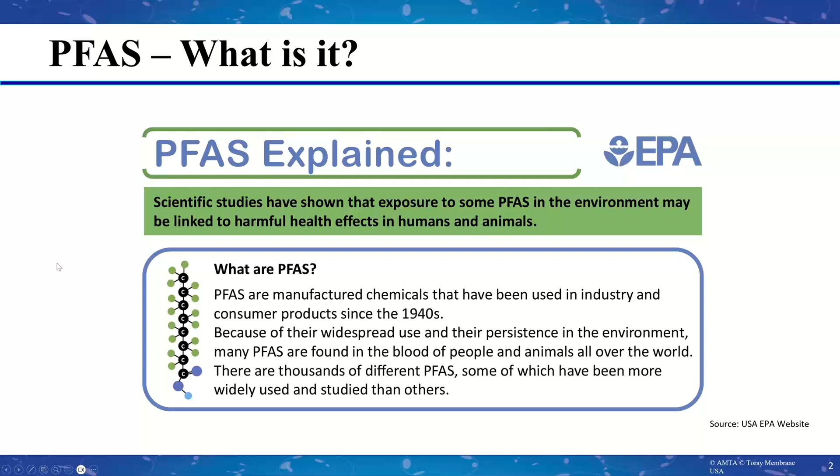Okay, so let's talk a little bit about what are PFAS, right? So PFAS are these manufactured chemicals that have been used in industry since the 1940s. So very, very common. We've all been exposed to them. There's widespread exposure amongst our population and amongst our waters. And you can find PFAS in the blood of people and animals all over the world at this point. So there's essentially full spread of these compounds amongst our society.

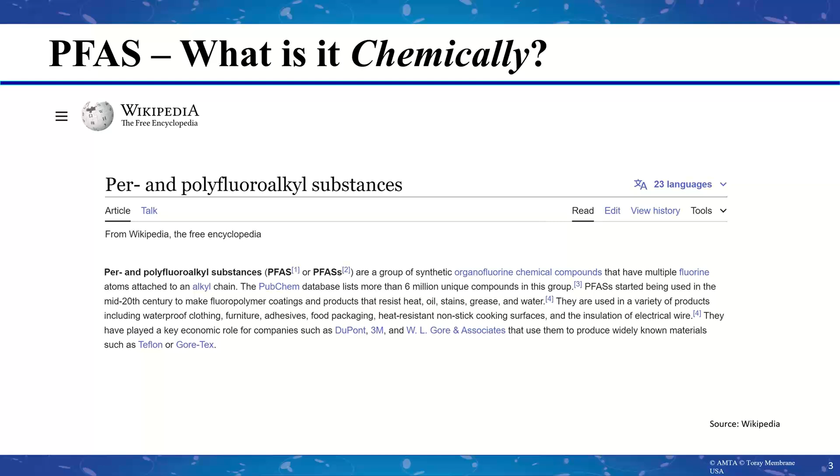And when we first started talking about these five years ago, we wanted to understand what is it that we're talking about. So what we're talking about is per and polyfluoroalkyl substances, right? So this is a family of chemicals, and it's a fairly broad family of chemicals. And they're all synthetic organofluorine chemicals. So if we're going to try and define that, if we're talking about organofluorine, what are we talking about? That means it must have multiple fluorine atoms and that they are attached to an alkyl chain, right? So that means you've got a carbon chain, and you've got fluorines directly bonded to the carbons on that chain.

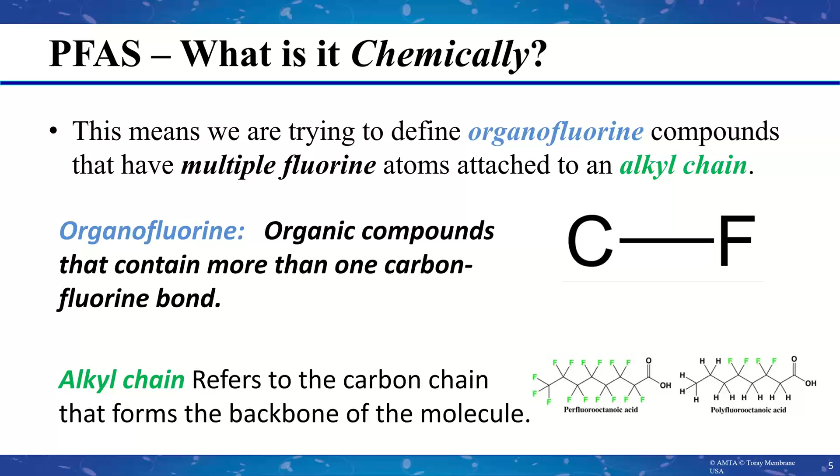So you put these two things together, and we have all sorts of examples of carbon fluorine chains that can take all sorts of forms. This particular example here is a PFOS, which is a fluorosurfactant.

I remember as a kid growing up and going skiing and spraying my clothes with Scotchgard to make them waterproof. That seemed great at the time, and knowing what I know now, maybe not so awesome that we were spraying our clothes with a carcinogen, right? Scotchgard itself, this particular chemical, is currently illegal in California and Maine, and obviously we're seeing more and more legislation that will limit and or prohibit the use of this type of chemical going forward.

Another example, which there are documentaries out there on, is PFOA, also known as C8, known for its 8 carbon chain structure. It's a carboxylic acid, used as an industrial surfactant, primarily to make Teflon, which as we know is very, very widely used.

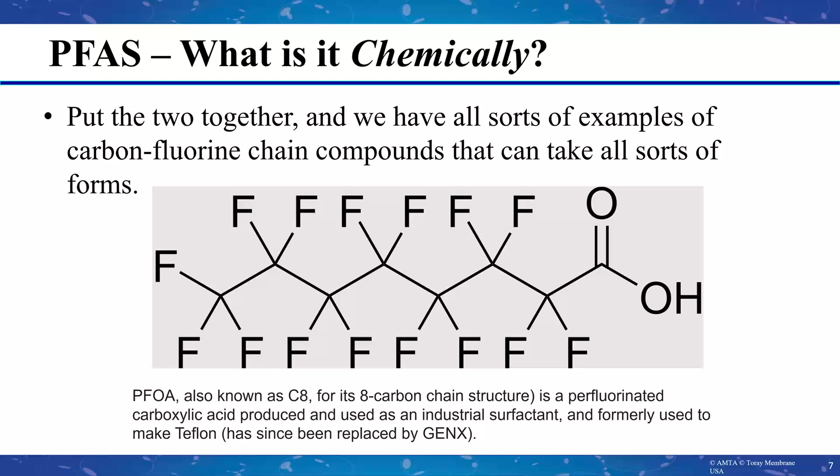So why were these chemicals used in the first place, right? The carbon fluorine bonds are one of the strongest single bonds in organic chemistry. What that means is these chemicals are very, very stable, which if you're making chemicals is usually useful in industry. It means they're less susceptible to breaking under exposure to other chemicals.

If any of you have ever worked with some of these in the past, that's why they work - they do not break down under the presence of other chemicals or oxidants, that sort of thing. They typically do not break down under heat exposure, and I'm talking about moderate heat exposure. Under extreme heat exposure, incineration type temperatures, you can break these carbon fluorine chains, but heat is not an especially effective way of breaking these chemicals down.

As surfactants, they could resist water quite well, right? Thus the Scotchgard use. And they could prevent bonding of food with pans. They could also prevent bonding of food with wrappers. So we've seen a lot of PFAS be used in food containers over the years as well.

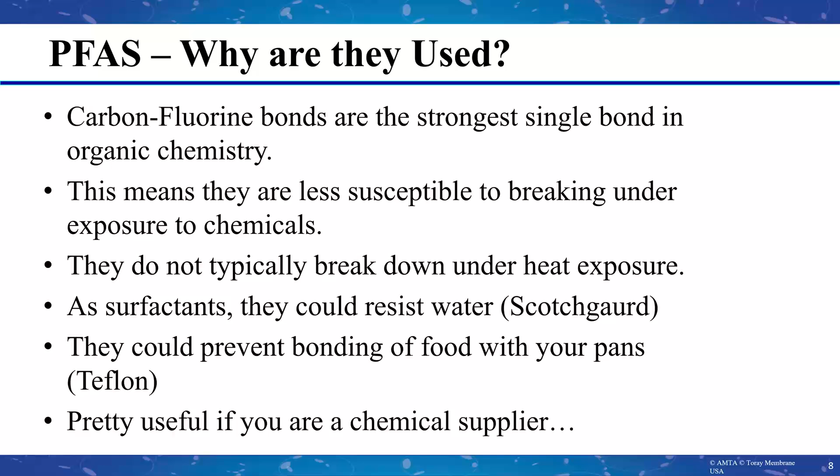So I bring all this up because all of these things are quite useful if you're a chemical supplier. But there's some downsides here that we've learned over the years, and because of this, that's the main reason why Teflon was used in non-stick pans. They used this example, the happy pan - I mean, I guess not so happy if you have cancer later from it - but as fun as that sounds, this is why things are moving away from this direction.

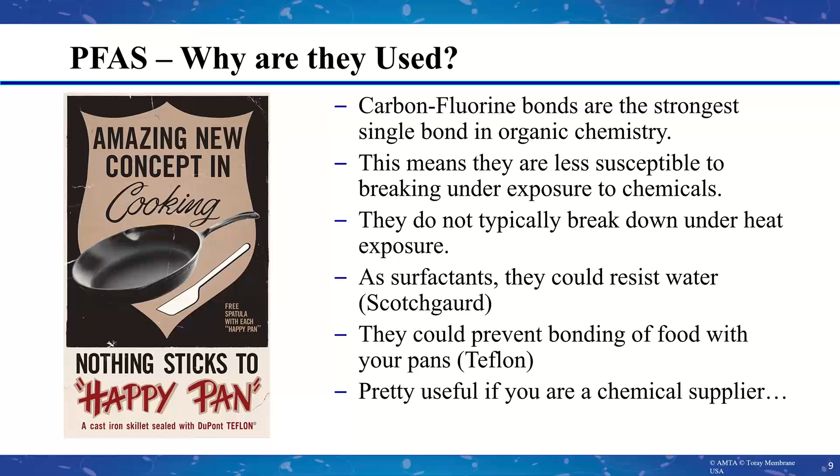So that brings us to, okay, we've identified these chemicals. We understand they're prolific in our environment, in our bodies even. And what is the North American situation? In the U.S. it is quite widespread, partially because DuPont and 3M were companies manufacturing this on a large scale in the U.S.

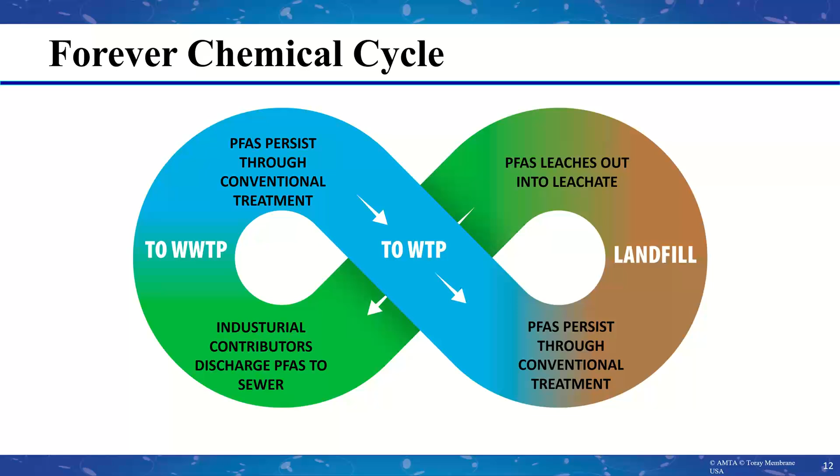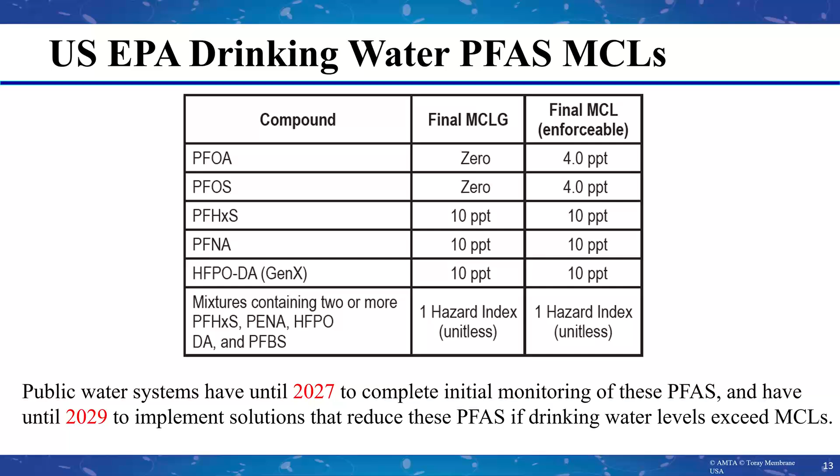And when we're talking about these PFAS removal technologies, there's multiple different ways of performing this. But when we're talking about reverse osmosis or nanofiltration, we're talking about liquid to liquid separation, right? And compare that, I'm trying to make that distinction between that and a solid to liquid separation, which would be the case in terms of carbon or resin style of separation.

So if we're going to talk about carbon just real briefly, right? Carbon is an absorption technology. It is the cheapest initial cost. That's nice. But what are the downsides? There are enormous disposal concerns, right? And the historical problem with carbon is, yes, it captures some of these PFASs, but it doesn't catch all of them. And then even in the ones that it does, now you have a disposal problem with carbon. You've got a contaminated media that you have to get rid of.

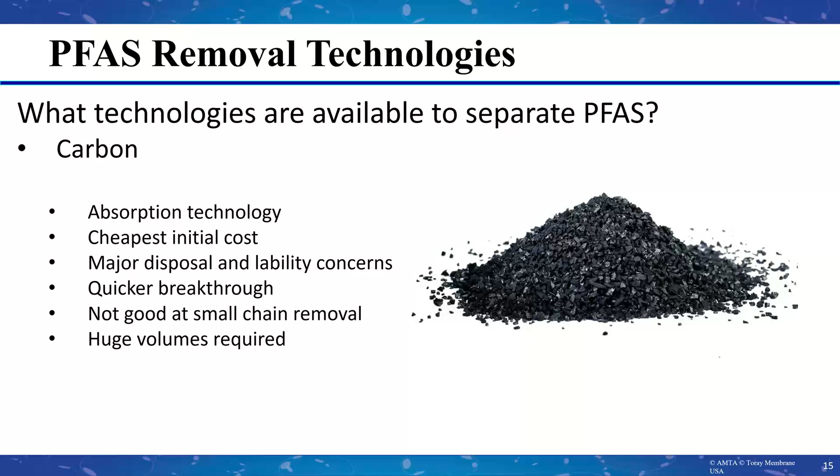They do have quicker breakthrough with carbon compared to the other technologies. And it's effectively not very good at small chain removal, right? The longer the chain, the more clumsy that molecule, and the easier it is for it to get caught in essentially the holes of the carbon. So small chain removal is quite ineffective, and huge volumes required, right? Huge volumes of carbon, and that can mean real estate on the water treatment plant site, which maybe they don't have. But again, that huge volume also goes back into the disposal issue.

And we've seen resin come into this space as well, and resin's made quite some good progress. It does have higher removal capacity than carbon. It's sometimes absorption only. So a lot of the original resins for PFAS were absorption only, but that means replacement is still required. It is higher cost than carbon, but typically lasts longer. Some are regenerable, but the regeneration can be quite expensive. And there's varying contact times, et cetera. So, we see resin playing a piece of the role in this PFAS separation scheme.

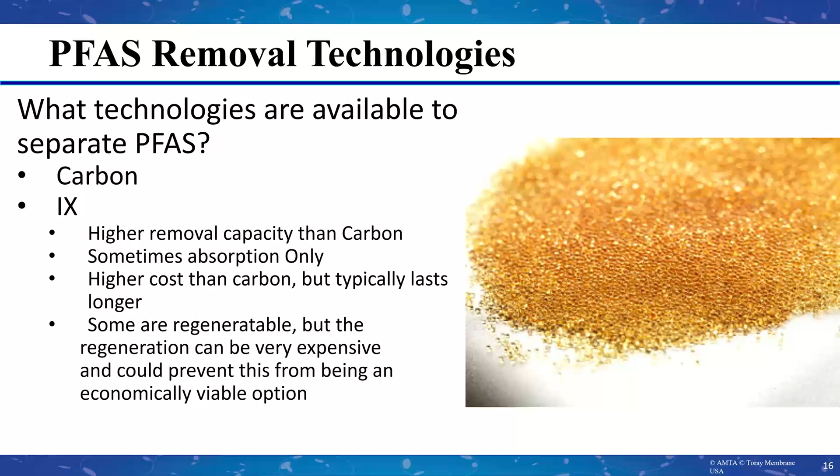But from what we're seeing, I think RO is going to play a very big role as well. And what about RO, right? So, in terms of separation, it has the best separation for all chain lengths. And this is a big area of R&D for Toray.

Compact footprint, that's nice, right? We all know how big an RO system is and how much water you can get out of a given space, and it is quite efficient in that regard.

We're getting better at it, right? If you had asked us 3 years ago what our rejection rates were of different PFAS molecules, we'd kind of look at you and say, I don't know, give it a try. We can make a guess based on its molecular weight, or whether they don't have much surface charge, which is the primary method of rejection for RO. But we could make some educated guesses, we didn't have a lot of data.

But we have been gathering data in recent years. And keeping it in the aqueous form, liquid to liquid concentration, does manage your liability, right? You don't have this disposal issue that you have potentially with some of the other products that are out there designed to help with this issue.

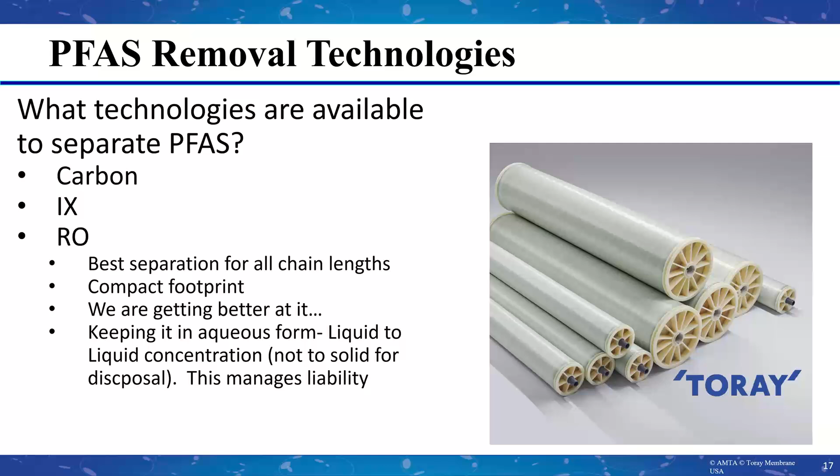Now that doesn't mean you're done with RO, but this might be one of the key steps in getting us where we want to be in our treatment scheme. And since I am from Toray and we focus on membranes, I would like to talk about membrane separation, specifically with PFAS and other low molecular weight, low surface charge constituents, and talk about what we're doing to figure out how to better reject PFAS with our membranes.

With any membrane, you're trying to get to this optimum goal where you're trying to pass as much water as possible and prohibit as much dissolved constituents as possible. And the best way to do that is to make your polymer chains as consistent as possible, right? We call it polymer chain cross-linking.

So this is when you make an RO membrane, you're effectively making a polyamide. A polyamide is a cross-linked polymer chain. And what you're trying to accomplish is to make these chains very consistent. The more uniform that you make it, the better results you will ultimately get with your combined water quality and energy savings simultaneously.

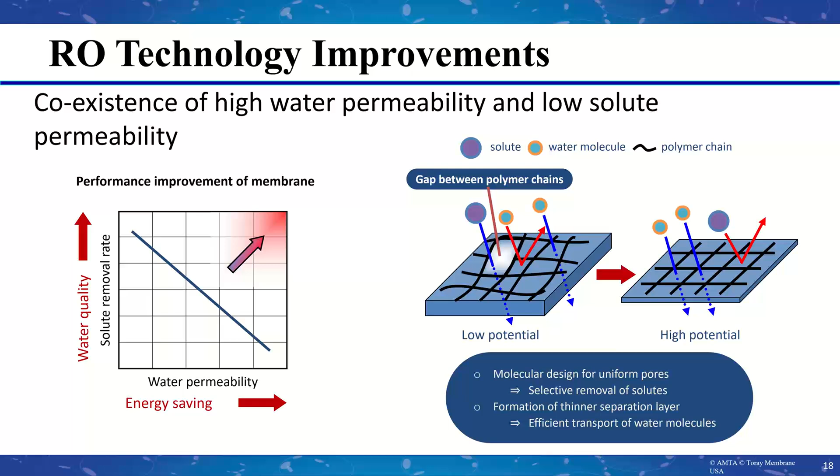And if we look a little bit closer at these membranes with some of our equipment here, our scanning electron microscopes, you can see what that membrane surface actually looks like. Now the membrane thickness is super thin, right? I want to say it's around the 20 nanometer thick range for the actual thickness of the polyamide.

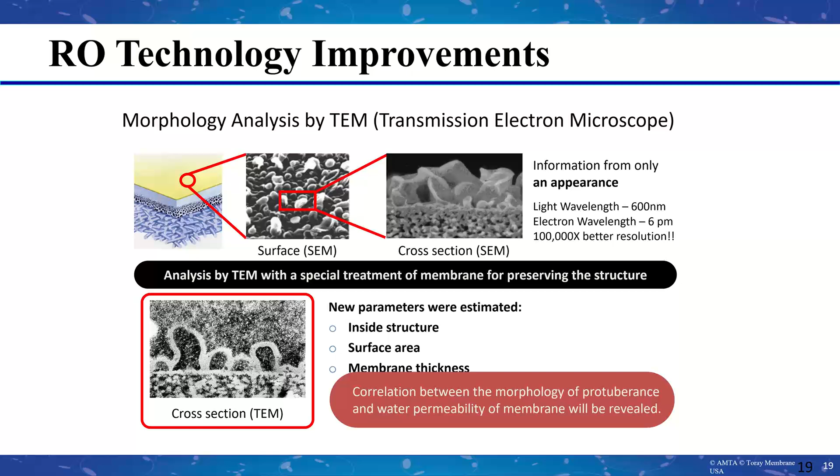So super thin. And you can see that cast on top of the polysulfone layer below, it actually isn't as smooth as you might imagine, right? It has what we call these protuberances and interstices, which are these peaks and valleys that we see in that polyamide. And breaking that down further, right.

It is very important to have a more consistent distribution of thickness, right? Because if you have thin areas, that is where most of your salt passage will occur. And if you have areas that are too thick, then you will not get sufficient water flow through those regions. So the goal is to make a very consistent but also very thin polyamide layer, and that's going to give you the best performing membrane that you can make.

So Toray spent a lot of time and effort in understanding these protuberances, how they form, how to control them, how to make them as consistent as possible. And this is really neat. These are some images that we've only made public in the last couple of years, but they're quite extraordinary. I've actually been to the R&D plant in Shiga, Japan, where we have the microscope that took these pictures.

But this is the cross section of the protuberance. As you can see, we're already at 20 nanometer scale, which is extremely high resolution. But this microscope can go all the way down to 2 nanometer scale, which is nuts. Because what you're looking at in the image on the right are the actual polymer chains of the membrane. So you're seeing atoms there, right? Which is really extraordinary that we can see this.

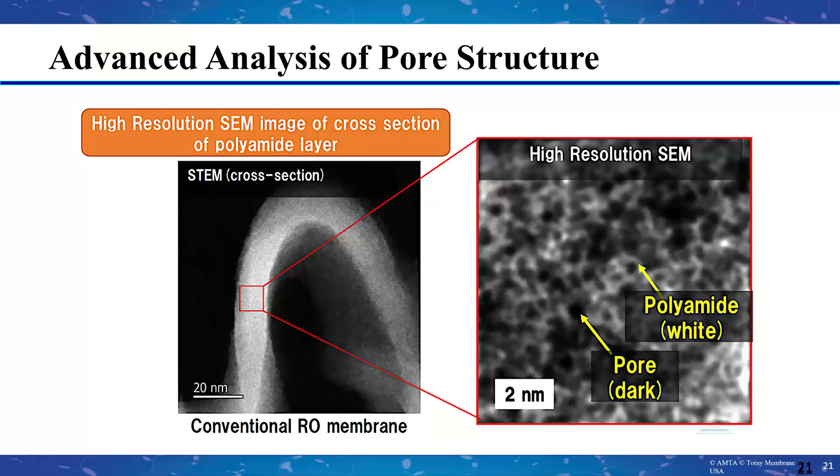And there's been some debate in the past about whether or not a membrane is a solution diffusion model, or if it should be a pore model. And we're quite confident it should be a pore model, because we can see the pores.

What does this lead us to? Why are we taking these pictures? Why are we spending this money to do this? Well, it's important for us to understand cross-linking on a very intimate level, and understand what changes we can make to increase the cross-linking and make that better.

And by closing those up, it doesn't significantly change your sodium chloride rejection, because that rejection is primarily held off from the surface charge of the membrane. But what it does change is the low molecular weight and/or low surface charge compounds.

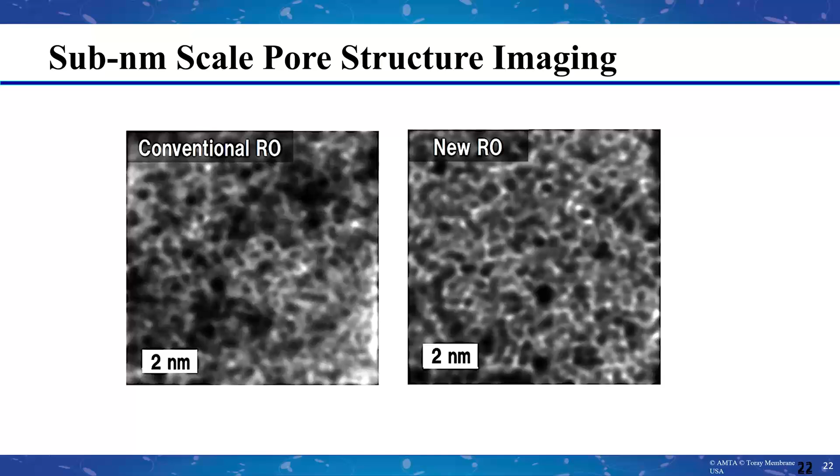And the reason that's important to us with this conversation is short chain PFAS, that's what we're talking about. You're talking about compounds that have very little or no surface charge and have very, very low molecular weight. It can be very difficult to reject.

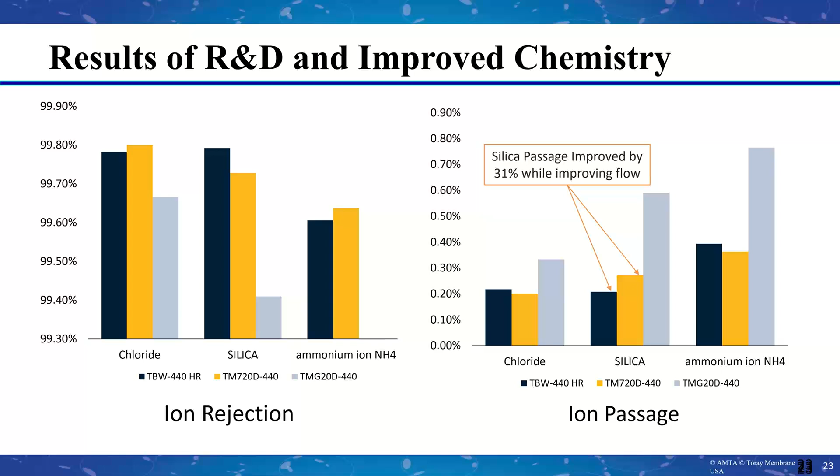The purpose of this webinar wasn't just to talk about RO and how RO can reject PFAS, because that's great, we've done this, we've separated these PFAS molecules out. But what on earth are we going to do with the brine? Because we've just moved the problem somewhere else, which is good in terms of handling high volumes of water, that's something RO can do, and we've moved it to a much smaller volume of water. But I don't think that means we're done.

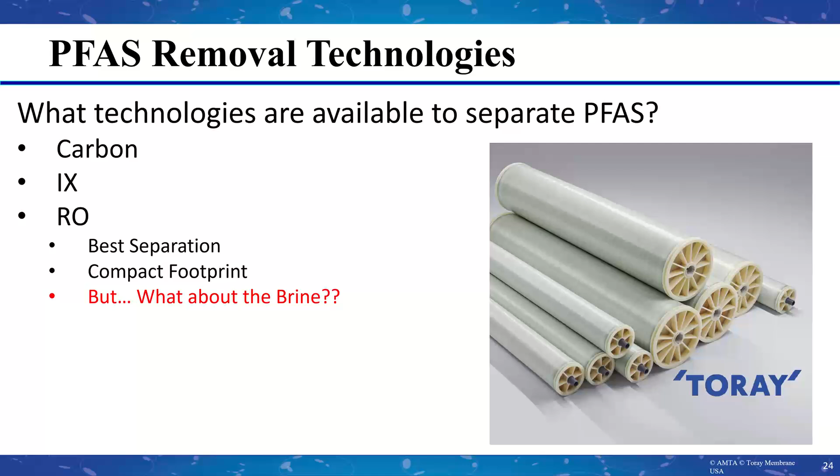And that's a big thing that Zia is here to talk about, because from here we need partnering technologies so that we're not just moving the problem downstream. We want to use RO to concentrate these PFAS, then use another technology to further concentrate, and then ultimately we want to get to full destruction. But you can't just use a destruction technology on the entire mass because of energy use considerations, et cetera. So with that, I'm going to pass it over to Zia, and she's going to explain more what solutions we might have with the brine.

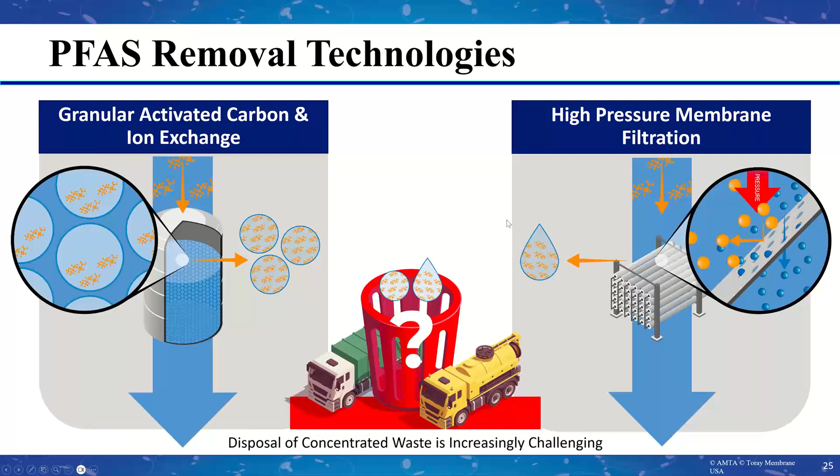So hopefully I can get the slide to go. There we go. Our focus today is going to be looking at the water treatment side, the drinking water plant side, really working to remove it from the drinking water, put it into a concentrated solution that we can then handle and protect public health, so we can protect our drinking water for all of us to continue drinking our tap without concerns.

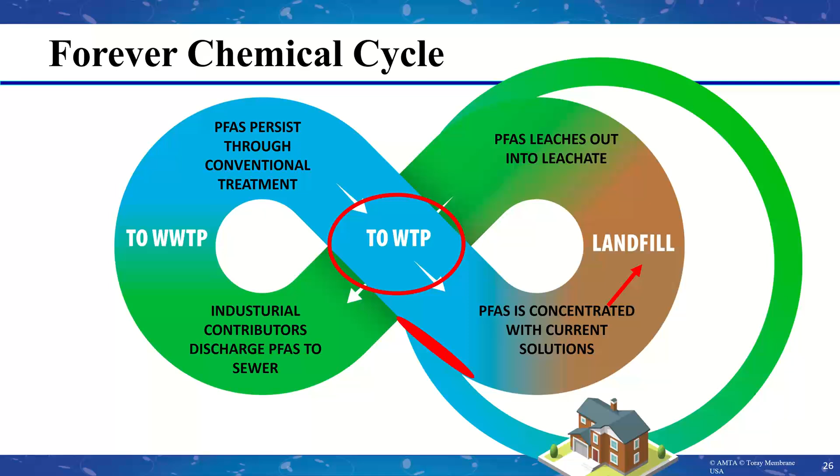We also see that PFAS is persistent, it's ubiquitous. There are studies showing it on Mount Everest from the ski wax and all the protective clothing you have to wear out there, all the way down into the Marianas Trench in crustaceans. So it is everywhere, and we see it throughout the entire water cycle. We see it in stormwater, drinking water, landfill leachate, whether that's from contributors or just stormwater falling on that landfill. So we really need to focus on a holistic solution that deals with PFAS once and for all.

See if this will go. There we go. So with the recent regulations in 2024, EPA came out with interim guidance. Obviously we also got the BOGO, buy one get one deal, of getting PFAS MCLs for drinking water, as well as the hazardous designation under CERCLA.

So with that, everyone's kind of figuring out where do we put these concentrated streams, and what do we do with those? The guidance currently, from the interim guidance from the EPA, is to use a hazardous waste landfill for concentrated streams, class 1 for non-hazardous. And I think we're all seeing that it's going to be an issue that persists.

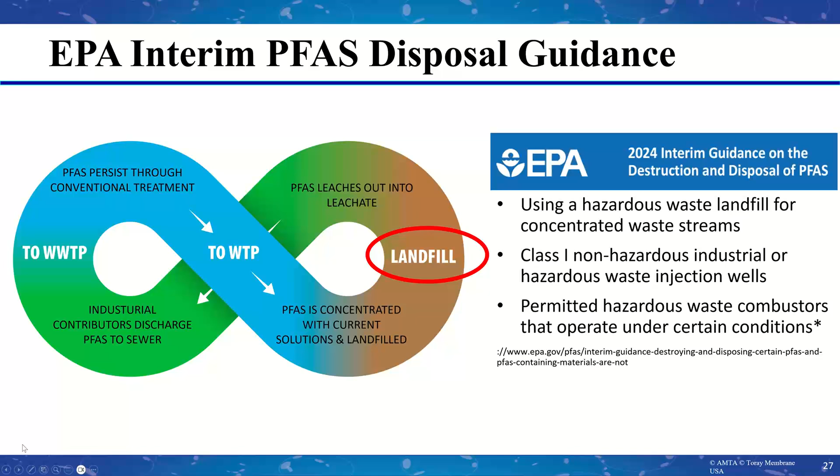If we're looking at PFAS destruction solutions, in the last 10 years people have been working on new PFAS destruction solutions. It's really accelerated in the last 5 years. This is a study and maturity scale that GWI, Global Water Intelligence, came out with in 2022. Obviously the market has changed, but from this 2022 maturity scale for technologies, the most mature that they rated was electrooxidation.

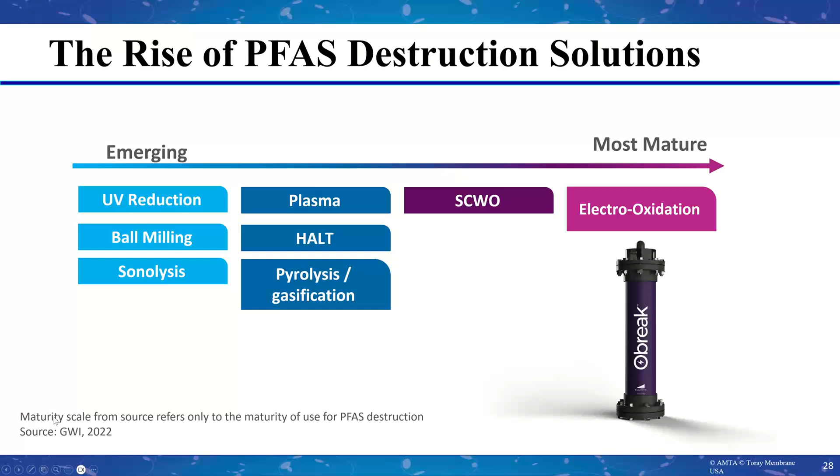So for our intents and purposes with electrooxidation, we're looking at high salinity waters.

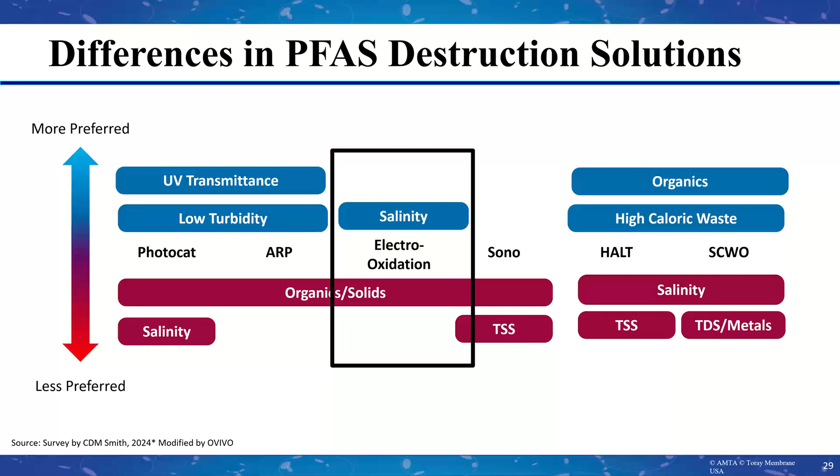Waters with higher salinity do quite well with electrooxidation, as it is a current-based technology, so the higher the salinity, the better conductivity you get, and so you have more efficient treatment. However, it doesn't handle organics or solids as well, and it really depends on the water treatment. So when we're talking about RO brine, electrooxidation appears to be a really good fit within that process flow diagram.

So electrooxidation. Obreak is our electrooxidation technology. It's electrochemical oxidation, or we just say electrooxidation. You pass a current through electrodes submerged in water. You have an anode and a cathode.

Unlike electrocoagulation, where you have a sacrificial anode that dissolves into the solution and creates a floc and sludge, this is a non-sacrificial electrode. So your anode does not dissolve into solution, and it remains with your reactor for the lifetime of that electrode.

It's a direct oxidation that is the main mechanism of PFAS destruction. It's directly happening at the surface of the anode. Electrical currents and oxidants come off of that anode, it interacts with PFAS, and we have a cleaving of the carbon-fluorine bond.

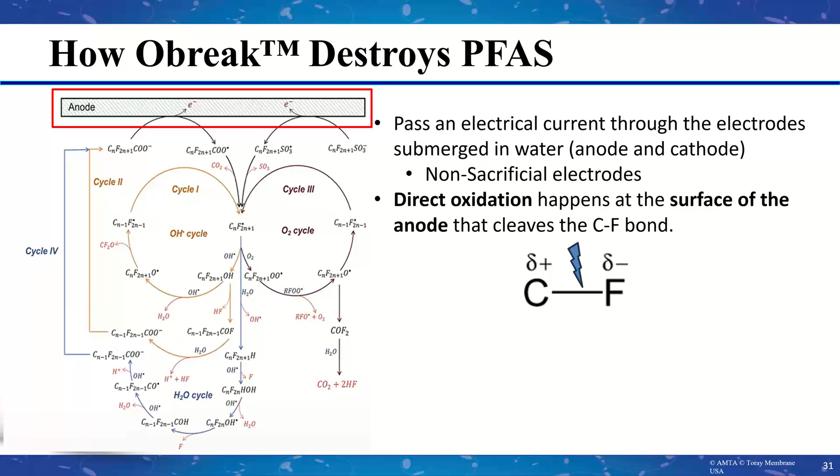So the higher concentration you have, the better contact with that anode you're going to get, and you get better efficiency for destruction. Indirect oxidation also happens within the solution, where radicals and oxidants are created with that electron transfer into the solution, and those oxidants then break down PFAS in the bulk liquid. It's not the main mechanism of destruction, but it is another reaction that does happen within the reactor.

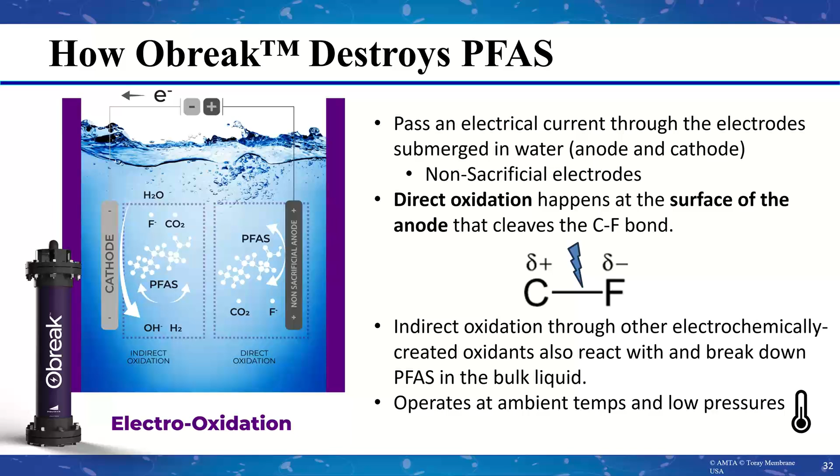One of the biggest positives for electrooxidation is that it operates at ambient temperatures and low pressures. Some of the other technologies out there operate at quite high temperatures and pressures to break down that C-F bond quickly. It's a little bit slower with electrooxidation, but it operates at ambient temperature and pressure.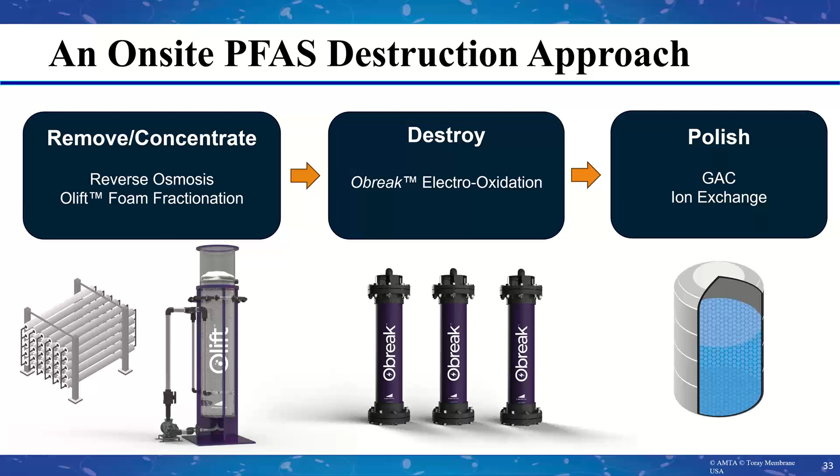So if we're looking at an on-site PFAS destruction approach, a holistic approach, we can concentrate it with reverse osmosis or Olift, which is our foam fractionation technology. We can destroy it with electrooxidation, and we can polish it with ion exchange and GAC. By including this concentration and destruction technology in your process flow diagram, you end up extending the lifetime of your polishing step and therefore really minimizing your disposal costs and volumes sent to the landfill or for regeneration.

So our case study that we've been working on for some years now has been done at a drinking water plant. This is a 10 MGD surface water plant. They have MF and RO, which was installed in 2020, and we've been working on the concentrate line - looking at how do we pair technologies on the brine to extend the life of their GAC prior to discharge back into their local river.

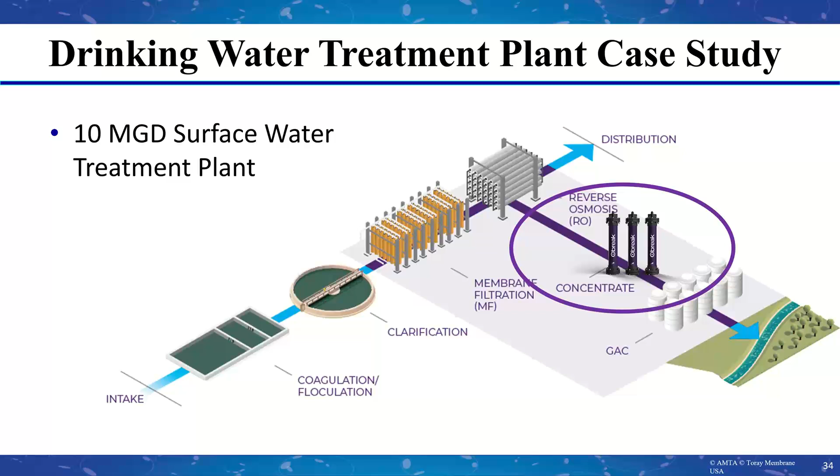And with that, I'm going to move on to some data here shortly. Hopefully I don't bore anyone with data, but too bad, it's the slides that we picked out.

So with reverse osmosis only for concentration, if you're taking a treatment train approach, it's going to look like sending 10 MGD to your RO at 90% recovery. So 1 MGD going to your electrooxidation, and then you would have your polishing step prior to discharge to the river, with 9 MGD going PFAS-free out to distribution to your customers.

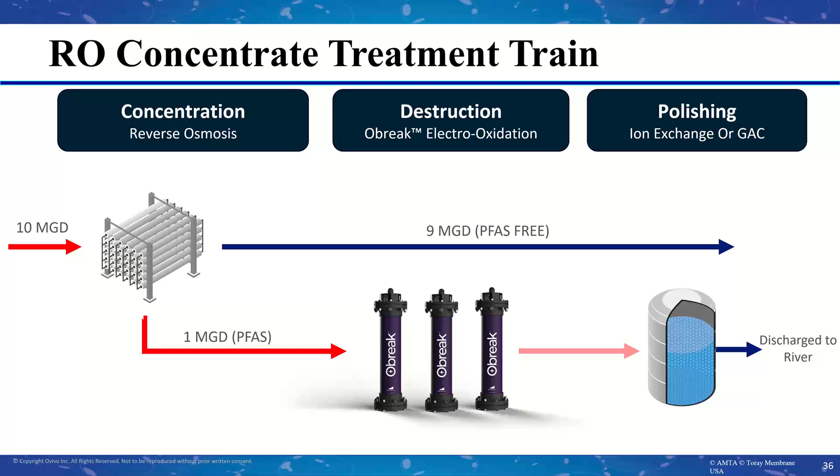So when we look at Obreak with RO concentrate only, so there's no further concentration upstream, we have 2 electrodes that we look at that we have available with Ovivo: our MMO electrode and our BDD electrode. And on the left, we have MMO here.

So you can see that we've got this first order reaction happening where you have an initial jump down in PFAS concentrations. PFAS is on the y-axis, treatment time is on the x-axis. And then you have this plateau where you're not seeing as much of a breakdown over time, and you're putting in energy, but you're not seeing as drastic of a treatment.

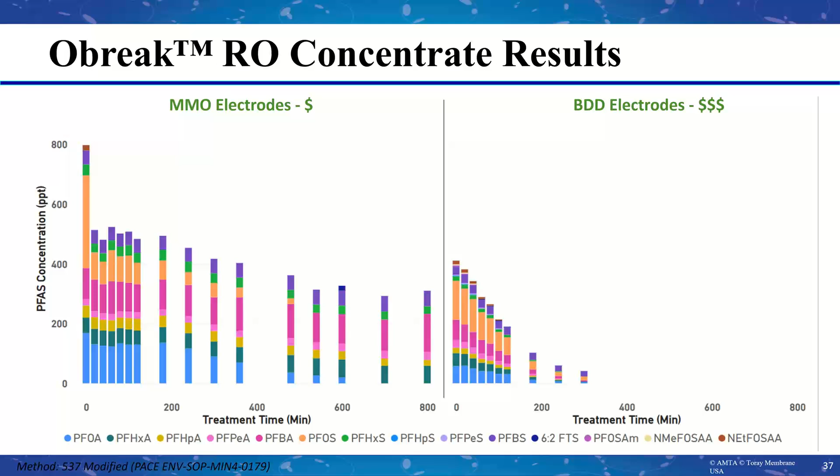Whereas with the BDD electrode, we see this 0 order, so somewhat more of a linear reaction destruction kinetics. And if we break this down for long chains versus short chains, our long chains on the left with the MMO again, we see the same trend, but we do see that over time, our long chains are actually still breaking down. It's more those short chains that end up being somewhat generated at the same time as destruction, because as electrooxidation is happening, you are cleaving that carbon-fluorine bond, and you're going from longer chain to shorter chain to shorter chain, all the way down to mineralization. So it's important to evaluate electrooxidation both in long chains and short chains and see where exactly some of those reaction kinetics are slowing down.

So on the left, MMO, we see, again, long chains are still breaking down. It is more of a plateau there in the middle, but then they continue to break down. And then on BDD, we have that 0 order, which mimics the total PFAS concentrations as well. And then if we go to short chains...

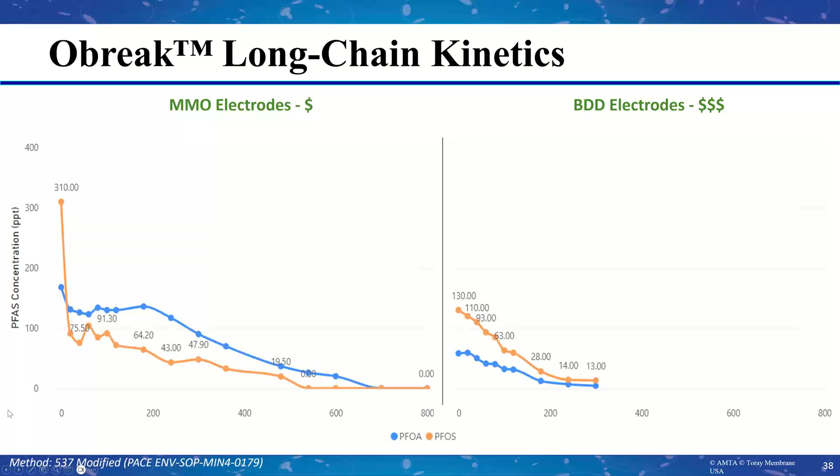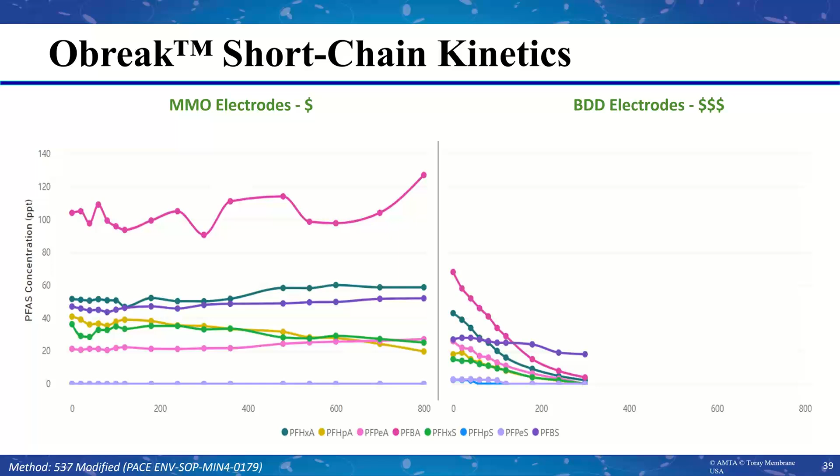If we go to short chains, this looks very different. And again, each step in the destruction reaction happens at a different kinetic timing, a different reaction time. So our long chains with MMO, they're breaking down, but our short chains are being generated at about the same rate that they're being destroyed. So we don't see that decrease in concentration just because those reaction kinetics aren't happening at the same rate for the long chains. Whereas with the BDD electrode, we do see that breakdown is happening faster than they are being generated, so we do see that concentration decrease over time.

Oh, okay, great. That just emphasizes what I said.

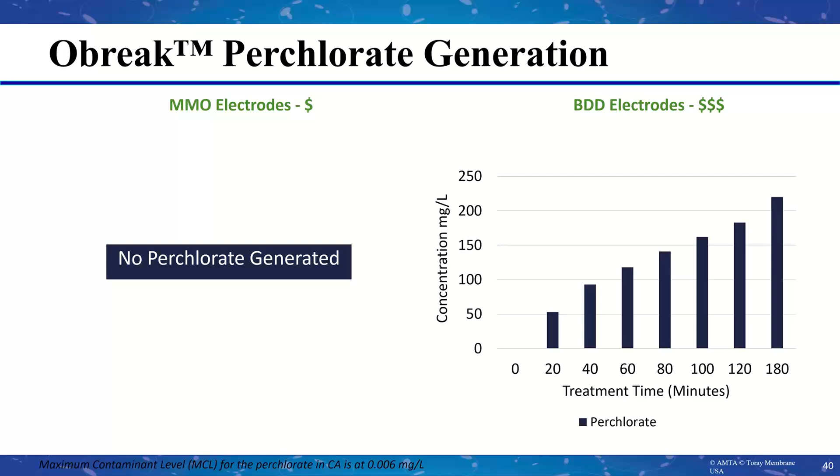So then if we move on to, with electrooxidation, there are byproducts. You are oxidizing water, so there are byproducts generated. With this water specifically, we see perchlorate generated with certain electrodes. So with our MMO electrode, even though we kind of saw that plateau with the PFAS destruction, we have no perchlorates generated. Whereas with our BDD electrode, we do have considerable amounts of perchlorate generated over time. That would be something that you would need to treat on the back end, depending on your limits and where you're using or putting that water.

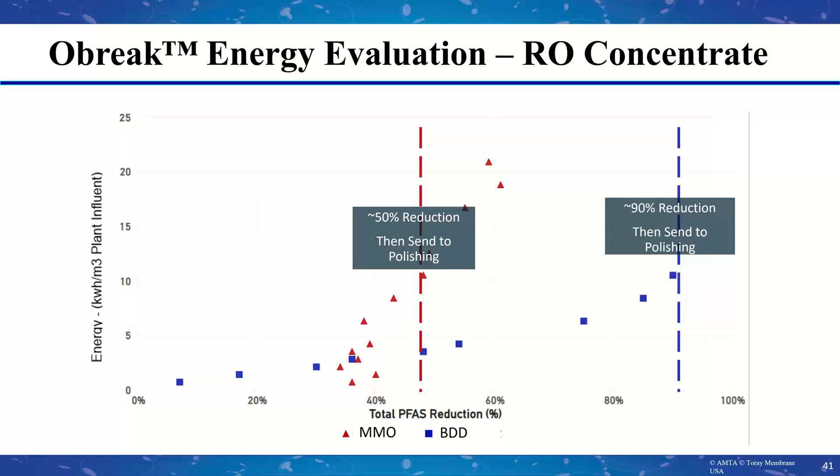So if we look at the MMO electrode, it's at about 50% of total PFAS reduction when you start to see that diminishing return, and at that point, we would recommend that you send to polishing. Whereas with the BDD electrode, you can see that we're still getting quite a bit of total PFAS reduction, so it's at about 90% total PFAS reduction when we would recommend that you send that to polishing.

So if we're looking at the RO concentrate treatment train summary, this is our data. We have our top 5 up at the top there in bold for viewing ease with our RO concentrate, and then on the right we've got a graph to easily view it.

So you can see total PFAS. With our RO concentrate, we have about 850 or so ppt of total PFAS. After destruction on that brine, we then get down to about 110, and then you send it to polishing. So the difference of what your polishing media would see is roughly 8-fold. With the RO concentrate, you would be sending that to polishing versus this 110 ppt going to polishing. So you end up extending the life of your media for that polishing step, minimizing your disposal costs, minimizing your changeouts, and just continuing to extend that lifetime.

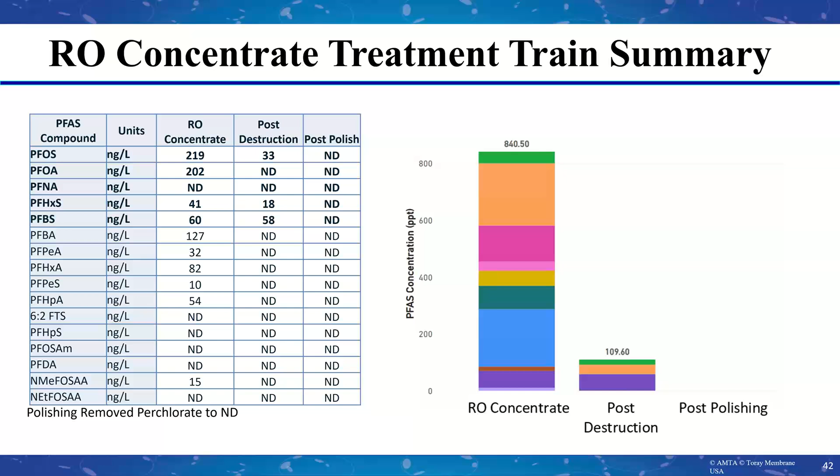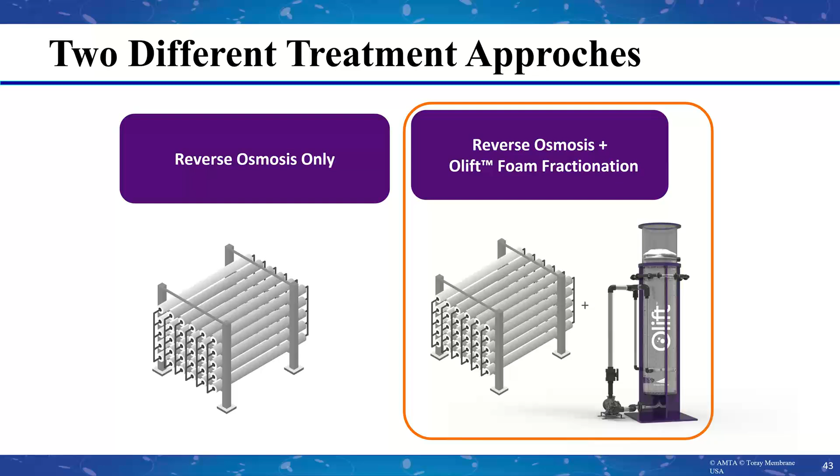So the next step is looking at pairing reverse osmosis with O-Lift, our foam fractionation technology. This is going to be taking the concentration step of RO and concentrating it even further. Foam fractionation is a great pair with RO concentrate. It utilizes PFAS's attraction to the air-water interface to remove PFAS through that attraction to a bubble. So you essentially put air, or in our case we can use ozone as well, into a column. It forms these bubbles, the foam goes up to the top, and you collect off that foam, and that foamate collapses back down into a liquid, and you treat that foamate.

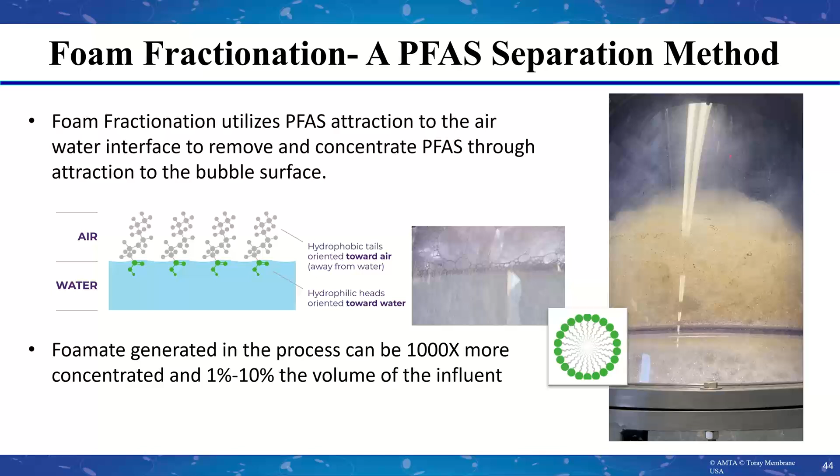So with our O-Lift system, we also can selectively use ozone. This reactor design is a continuous design, and we can selectively use air and ozone to create microbubbles. Ozone is another oxidant, and so it has a higher overall surface area and an electrostatic charge compared to air. This significantly boosts PFAS removal and concentration factors, especially when it comes to short chains. Short chains tend to not be as attracted to that air-water interface, and so with ozone it increases that attraction to that surface. And then we'll see as well with ozone that downstream destruction and polishing is much more efficient.

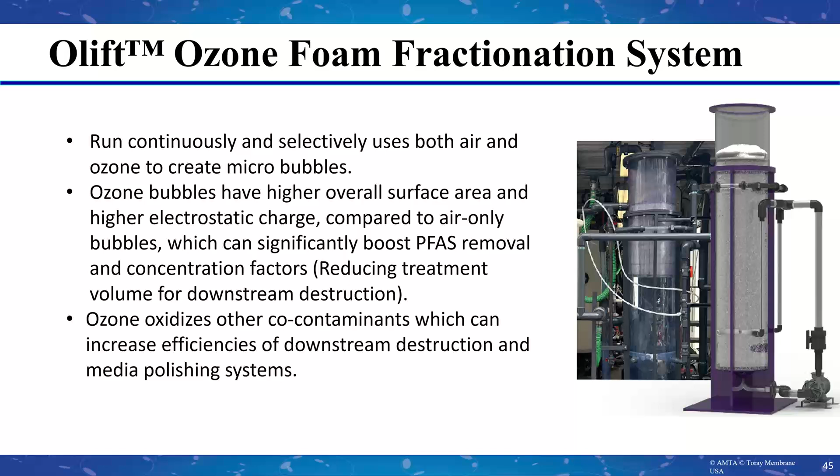Okay, so this is our pilot system for O-Lift. As you can see here, we've got our raw water going in. We have 3 reactors in our primary treatment train. So our water comes in, goes through reactor 1, reactor 2, reactor 3, and then it goes out to your polishing media. The foamate from the first 3 reactors in series is composited into a tank. It all collapses back down into a liquid, and then we concentrate it up again in a secondary train, stepping up the concentration even further. That foamate then we send to destruction.

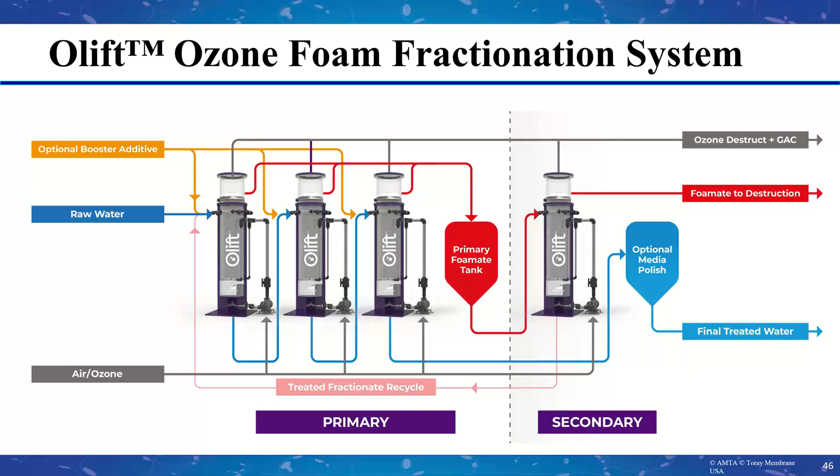So if we're looking at the full treatment train process flow diagram, you have your RO up front, taking into account about 90% reduction in our case for this case study. Our 1 MGD goes to foam fractionation, and we get about 1% or less going to electrooxidation in the form of foamate. So you end up sizing your electrooxidation for that 1% of the 1 MGD rather than the full 1 MGD here, and then the clean treated water from foam fractionation would go to your polishing media.

And one of the treatment options that we've also been working on, looking at, and continue to pilot is recycling that destructed water from the O-break. By sending it back to the front of O-Lift, you can then concentrate it back up again, go through the destruction step, and recycle it to the front end. So instead of sending that water to your polishing step, you can continue to concentrate and destroy, concentrate and destroy. That destruction step makes this possible with that mass balance in mind.

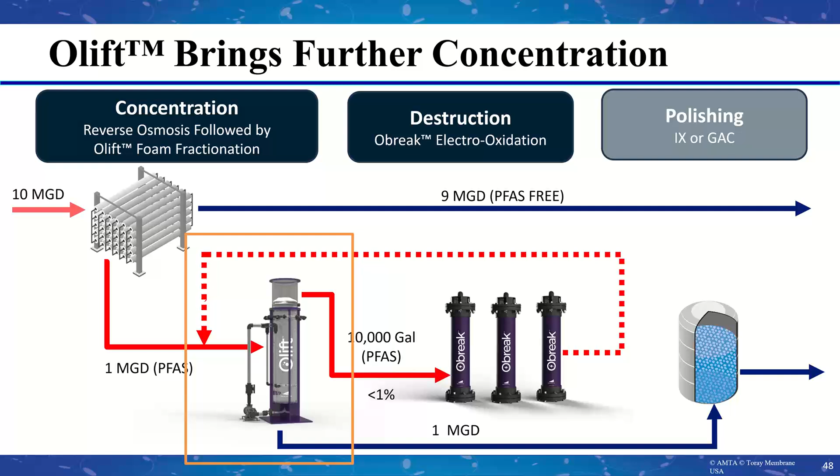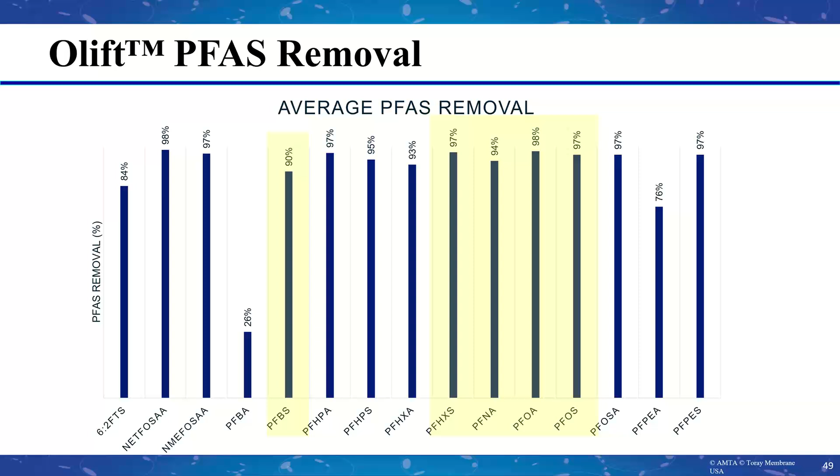Okay, so we're going to look at foam fractionation data from our RO concentrate into the foam fractionation or O-Lift system. This is our average PFAS removal, highlighting the 5 main regulated ones: PFOS, PFOA, PFNA, PFHXS, PFBS. You can see high PFAS removal, even for some short chains: 90% with PFBS, 97% for PFHXS, 94% for PFNA, 98% removal for PFOA, and 97% for PFOS. So we're getting really high PFAS removal from our influent RO concentrate.

In terms of volume reduction, we also see a massive volume reduction—99%—meaning you end up sizing that O-break system for that 1% rather than the full RO concentrate line.

I also want to highlight the concentration factor you're getting here. With electrooxidation, direct contact with the electrode is the main mechanism of PFAS destruction, so the higher the concentration in your stream, the more efficient the electrooxidation will be. With the RO concentrate, we had around 1,000 ppt, and with this foamate, we end up with 38,000 ppt of total PFAS.

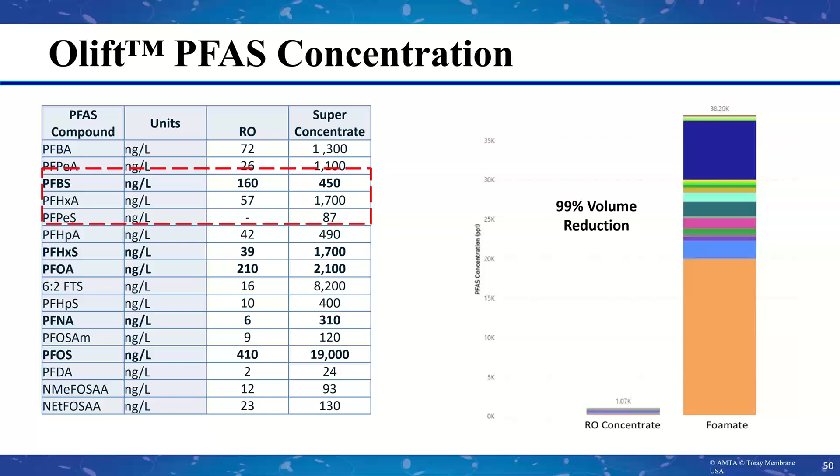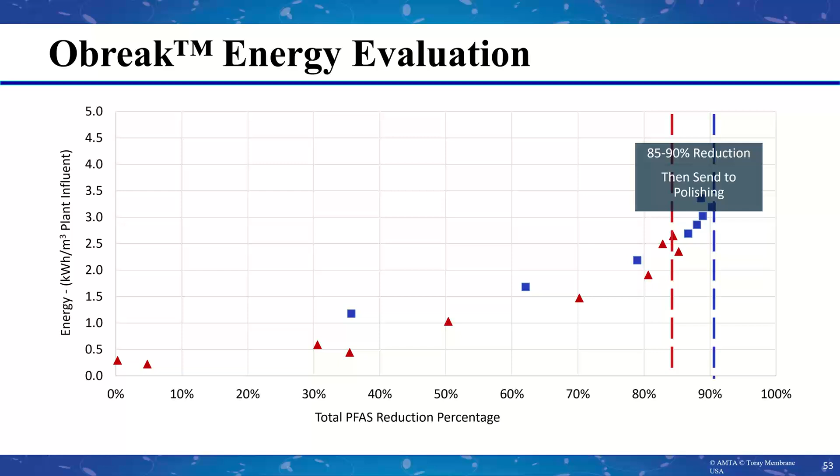If we move to energy consumption and total PFAS reduction percentages, we're seeing very similar reaction kinetics with the foamates for both electrodes. So we would probably recommend roughly the same treatment for both: somewhere between 85 and 90% total PFAS reduction is about when you would want to send that to polishing or recycle it back to the front end of your Olift.

Looking at a summary of the treatment train: our RO concentrate comes out somewhere around 800 to 1,000 total PFAS ppt. Our foamate is then boosted up to 56,000 ppt, and post-destruction we get down to about 5,500 ppt. This can then get recycled back to the front of the Olift, concentrating it back up in your foamate rather than sending it to polishing.

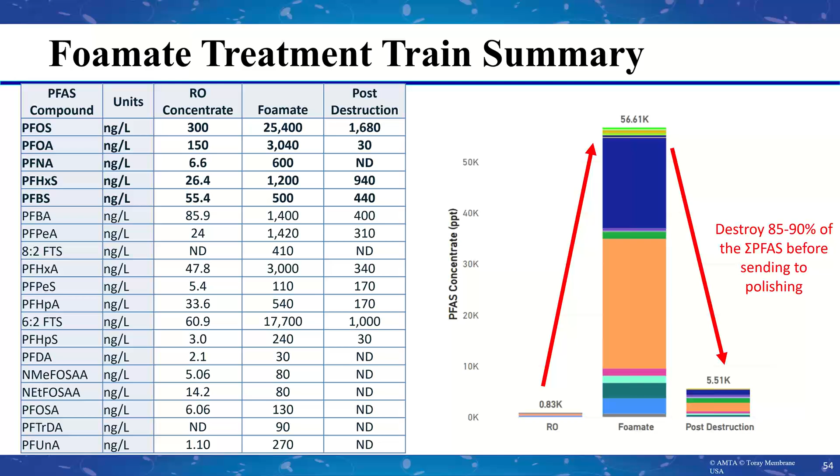Just to wrap things up on the PFAS destruction side: PFAS removal is a huge municipal issue that needs solving, especially with the 2029 deadline to have everything in place for our MCLs. RO is in the primary position for large-scale, robust PFAS removal and concentration, and as Sean's presentation covered earlier, it's a great fit for large streams. RO applications must have a solution not only to remove PFAS from the concentrate, but...

We also have solutions for the brine. Electrooxidation for PFAS destruction is a great technology that pairs well with the high salinity from the RO concentrate, and it's positioned for safe on-site operations by water treatment operators. When you couple it with more upstream concentration, destruction becomes higher energy efficiency and cost efficient. We have the right tools, and it's time to implement what we've learned in society to solve this critical problem.

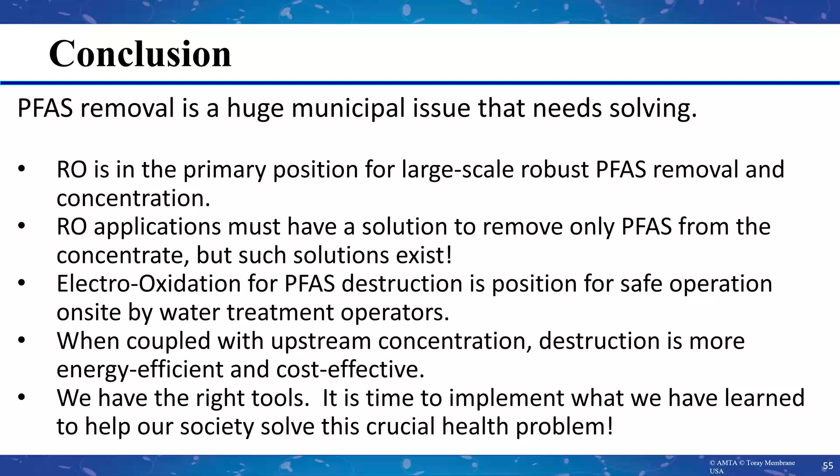I don't know if there's another slide. Oh, okay, I might have skipped it. Sorry.